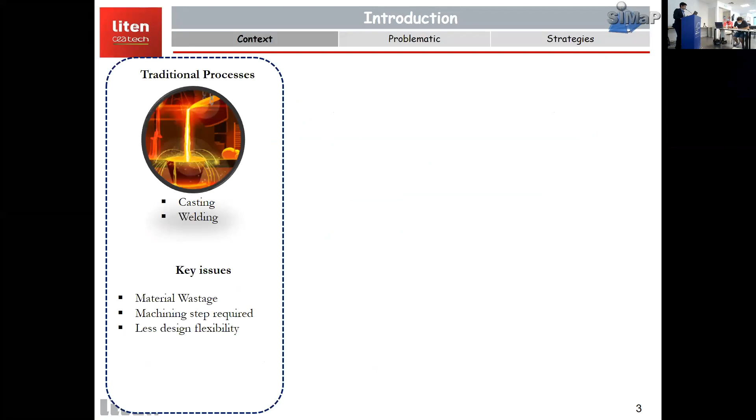To start with the context of study, most of the traditional processes, like casting and welding, have some key issues related to, for example, materials wastage, a lot of machining steps required, and less design flexibility. So to address this issue, let's think about additive manufacturing technologies.

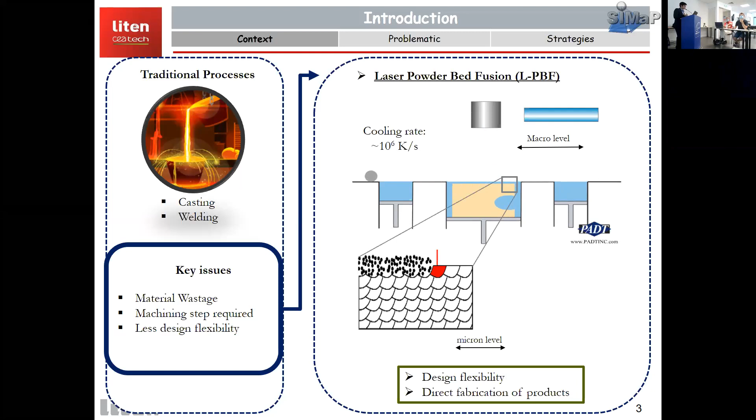For example, here the laser powder bed fusion, L-PBF process, which we used in the context. With the laser, basically you are melting the powder material, and due to the rapid solidification at very high cooling rates, for example 10⁶ Kelvin per second, you end up having very fine micro level melt pools, which leads to design flexibility with this process, and you can end up getting direct fabrication of products.

Now if we are looking into the additive manufacturing of aluminum alloys, the casting family is the most used, like the AlSi10Mg and AlSi7Mg, for instance. If we do L-PBF of these particular alloys, it's very easy to process, and you can get complex structures and complex parts directly out of it.

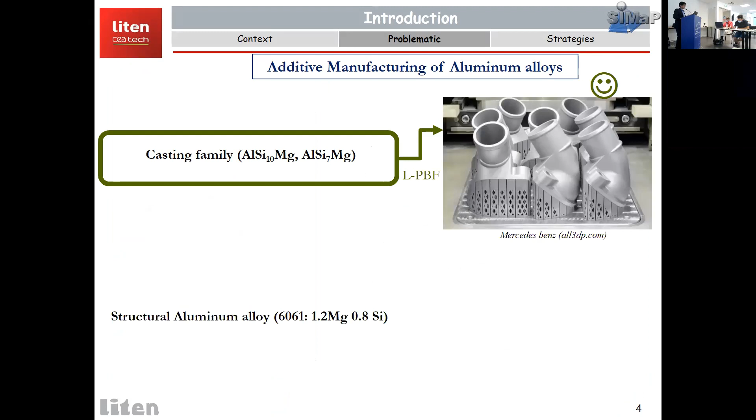If we look into the structural aluminum alloy, for instance, the 6061 aluminum alloy, which has magnesium and silicon as its major alloying elements, if we do the L-PBF of structural aluminum alloys, we tend to get a lot of cracks, and it's very difficult to process.

So now several strategies can be thought of to solve the problem of cracks. For example, the first one can be the solute content modification, which is very much reported in literature, like adding zirconium and scandium to induce heterogeneous nucleation sites, which gives you grain refinement, and this leads to cracking mitigation.

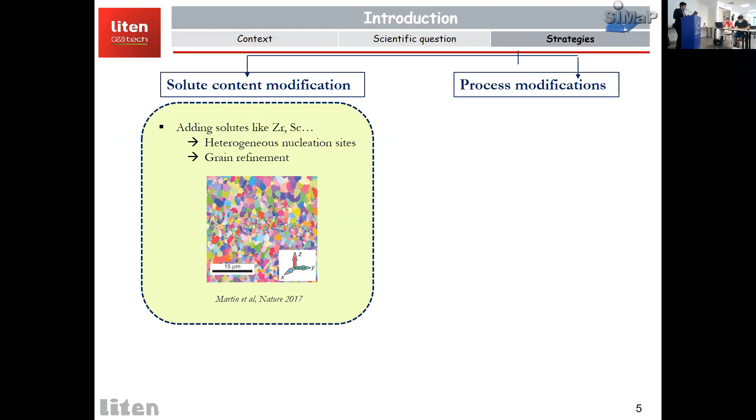The second way can be thought of as process modifications. For example, changing the laser power, laser speeds, the preheating, the scanning strategy, basically to change the solidification conditions like thermal gradients and solidification velocity.

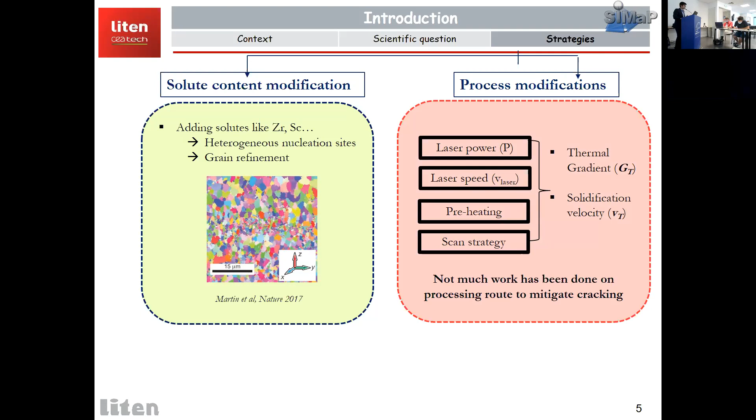But not much work has been done in this part of the strategy. For example, there's not much literature reporting cracking mitigation due to process modifications. So my thesis is focused on this particular aspect. The goal is to understand the fundamental mechanism of cracking, and if possible, produce guidelines to mitigate it, and also to understand if process optimization can produce crack-free samples or not.

Moving into the materials and methodology section. To start, describing the powder characteristics of the 6061 aluminum alloy. Here is the first composition - the standard composition of 6061 aluminum alloy and the actual composition of the powder we used. The composition is quite in the range of the standard.

In terms of morphology, the gas atomized powder clearly shows some satellites, spherical shape, and the powder morphology is polycrystalline in nature. In terms of size distribution, the powder was quite good in terms of the L-PBF requirement, going from 20 to 60 microns, and we achieved that size distribution with our powder.

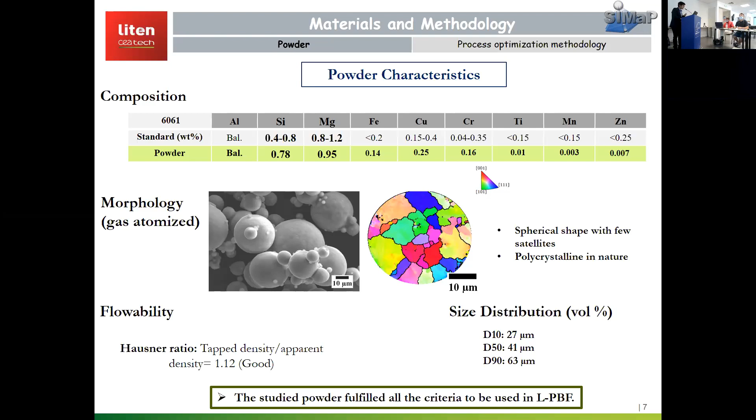In terms of flowability, this is also an essential criteria for L-PBF, because good flowability produces good dense parts. We classified and quantified this flowability based on a Hausner ratio, which came out quite good, and that's how we concluded the powder was good in flowability. So all these criteria were fulfilled in order to be used in L-PBF.

Now the methodology of the work. We started with the powder, did some 1D analysis and 2D track analysis with the laser tracks. The goal was to identify stable melting conditions, and based on those we can identify the process parameters, for example which laser power and laser speeds are needed to attain stable melting conditions.

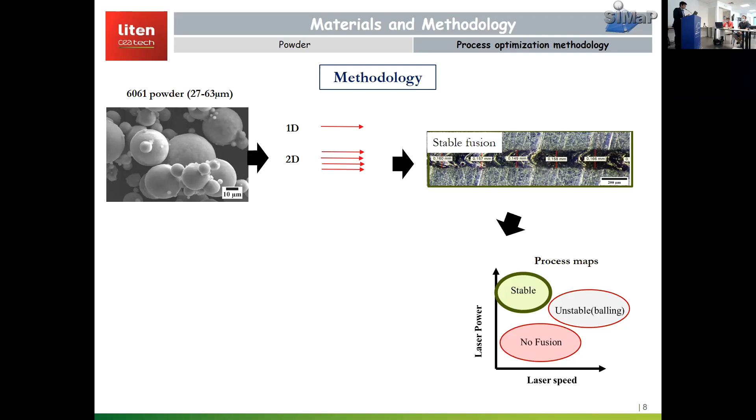Once we have that, we can print 3D cubes and identify the best optimized parameters. The goal is to achieve the highest relative density, dense sample, assuming stable melting conditions provide dense samples. The second goal is whether the stable conditions give cracking mitigation or not.

Moving into the results and discussion of this processing optimization methodology. To start, we did basic single track analysis, and studied the melt pool dimensions, for example the length to width ratio as a function of linear energy density - which is the ratio of laser power to laser speed. We can see clearly a rectangular hyperbola.

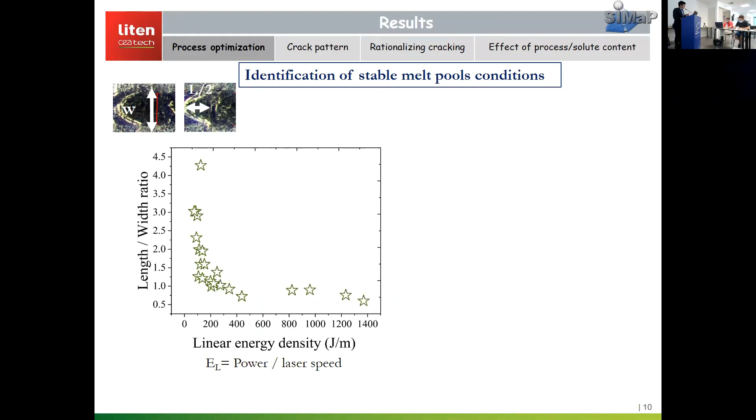For example, if you are at low energy, you have high length to width ratio, and at high linear energy density, your length to width ratio decreases. So for low energy densities, low power, high laser speeds, we found two particular conditions which are basically instabilities due to high speed - these instabilities are balling and humping.

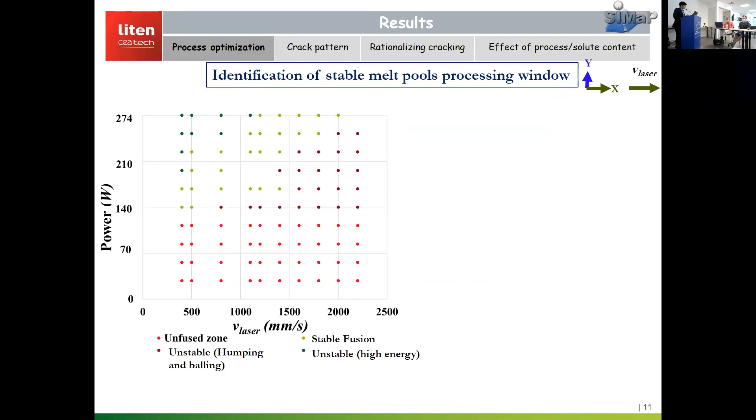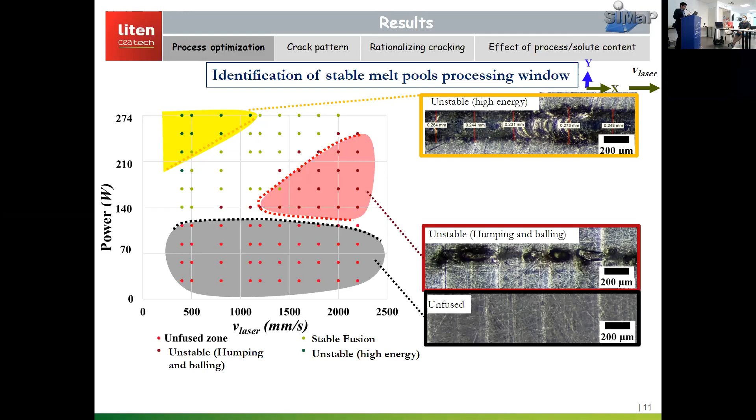If we look at similar different conditions in terms of the processing map, the y-axis is laser power and the x-axis is laser speeds. If you are at sufficiently high energy, you can end up getting unstable melting conditions, possibly due to intense convection flow from the high laser energy density. If you are at low energy density, low power, you can get an unfused region. If you are at sufficiently high laser speeds, you can get humping and balling as explained previously.

There can be particular stable melting conditions, which we identified as the green zone here. This was identified in the 1D track analysis. A similar processing map was identified for the 2D conditions, to understand the effect of when a laser passes just adjacent to a previous laser track. Similar conclusions were found using the 2D analysis.

So now we have identified stable melting conditions. Let's try to see the effect when we finally 3D print the cubes. For printing the cubes, we chose a simple scanning strategy without any rotation between the two layers. The choice of this strategy was to have a simple microstructure which is easy to interpret.

Based on the stable processing conditions we saw, let's analyze the density of the sample as a function of linear energy density. The density of samples increased as a function of linear energy density.

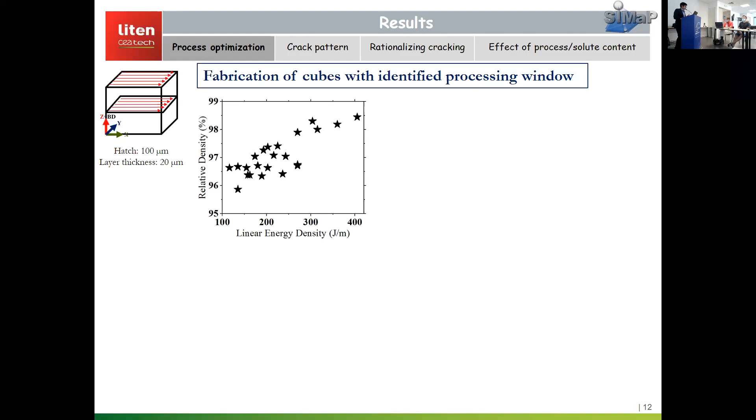For example, for low laser energy density, we can get microstructures having lack of fusion porosities, due to the lower linear energy density being given. If we increase the laser energy density, we tend to decrease the lack of fusion porosities. We achieve good relative density up to 98.5%, but we still have cracks present in the microstructure.

So all the stable conditions led to cracking, but there was a particular trend we observed. The mean cracking density measured from the microstructure decreased as a function of linear energy density.

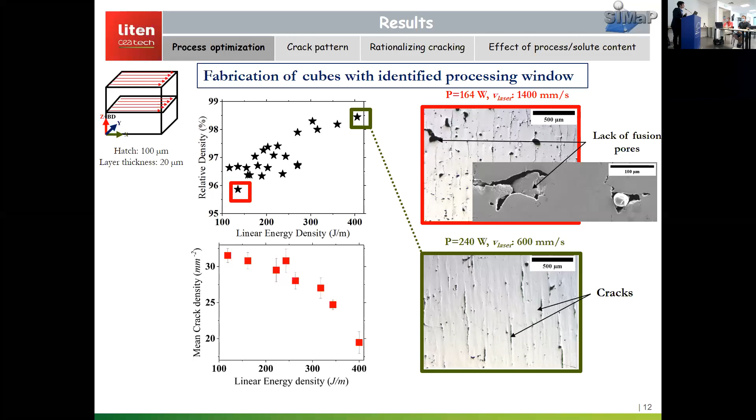So now one can say that since increasing linear energy density decreases cracking tendency, why not give more energy to the sample? Let me remind you, as I said in the previous slide, if we give sufficient energy we can end up getting instability conditions. So the optimized parameter here corresponds to where we found the maximum relative density, but cracks were still produced.

Moving into the cracking pattern, how does it occur and what is its mechanism? First, we identify where the cracking occurs based on the microstructure.

We chose the sample that was optimized, which had the least cracking, and analyzed its EBSD microstructure along the building direction. We clearly see that cracks are present in the microstructure along the building direction, and those are specifically along the grain boundaries.

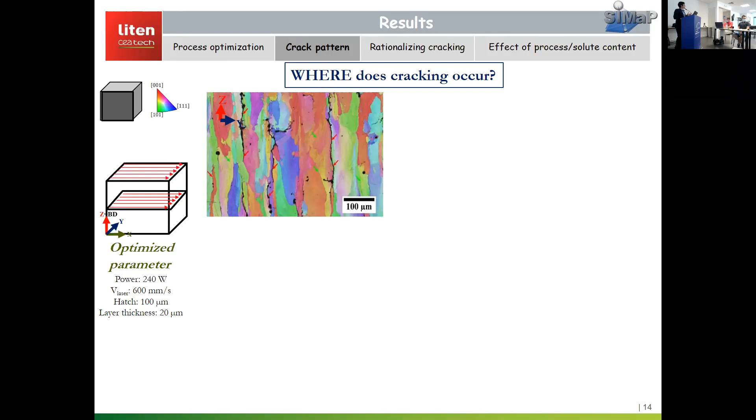But there were also a few high angle grain boundaries which were non-cracking in nature. To identify why these high angle grain boundaries are non-cracking, we thought we'd look at the relation of cracking with respect to the melt pools.

We clearly see that cracking is along the center of the melt pool. This explains why certain high angle grain boundaries, located away from the melt pool center, can be non-cracking. So cracking is intergranular in nature, occurring along high angle grain boundaries and exactly at the center of melt pools.

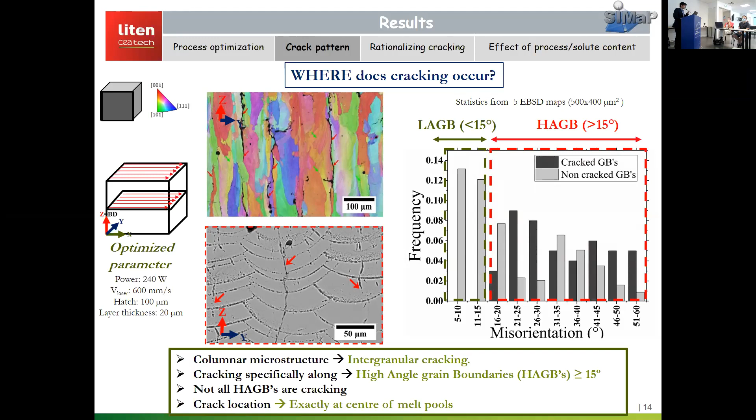Now let's see when cracking occurs. To do that, we performed fracture surface analysis, doing a tensile experiment on cubes perpendicular to the building direction. The aim was to identify the fracture morphology, so we could understand the origin of the cracking.

For example, here you see cellular dendritic arms growing, and a bit of initiation of secondary dendrite arms, though those are still in their initiation phase. This clearly indicates that cracking is due to liquid films trapped within the dendrites.

Now, cracking due to liquid film can be due to solidification or liquation. Solidification cracking can occur during the last stage of solidification, or liquation cracking can be due to remelted melt pools, for example.

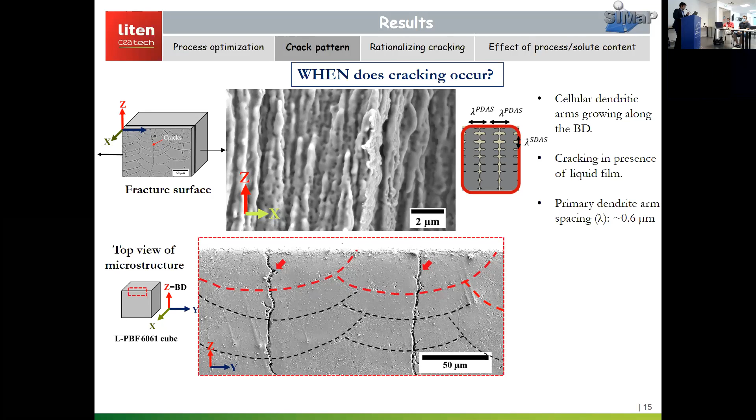To resolve this ambiguity, we looked at the final melt pool, the topmost melt pool regions which are not remelted. We clearly see cracks occurring in the last melt pool, which suggests that cracking is due to solidification cracking.

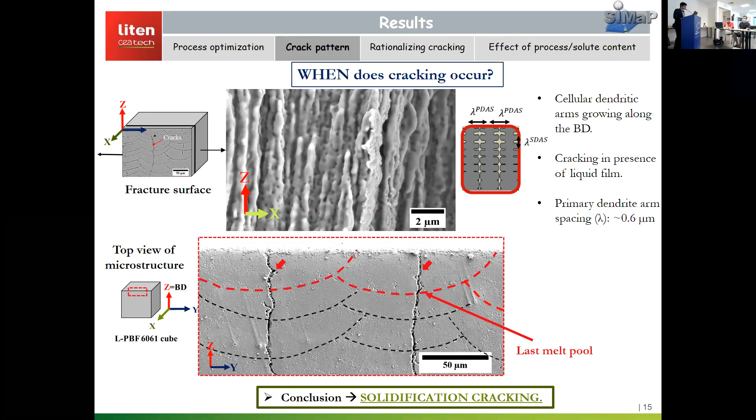Now we have identified where cracking occurs, along high angle grain boundaries at the center of melt pools, and we have also identified the cracking mechanism.

So now let's rationalize this observation based on different hot cracking models. The objective is to explain our experimental observations and justify why cracking is occurring in this particular way.

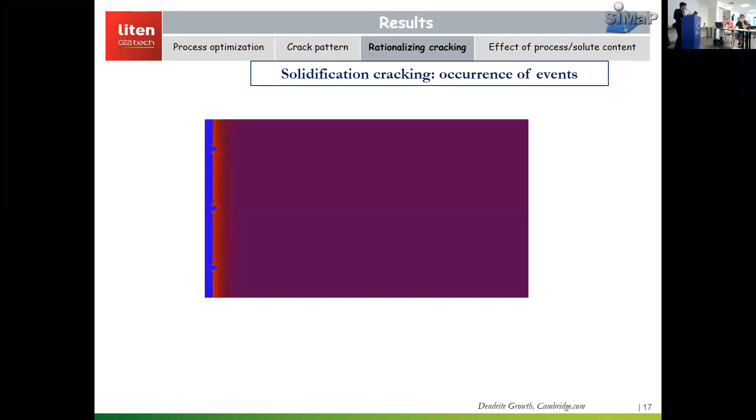So let's have a notion about what is solidification cracking and its different occurrences of events. For example, if we see the solid in blue color here and the liquid in violet color, and as a function of along the thermal gradient direction, our solids will grow. For example, you see the dendrites are growing.

At a particular stage, we reach a first stage where you have high liquid permeability, which means the liquid can easily enter the dendrites and compensate for shrinkage and deformation. Most alloys have this issue with shrinkage because the density of solid is greater than the density of liquid, so you have shrinkage and deformation issues.

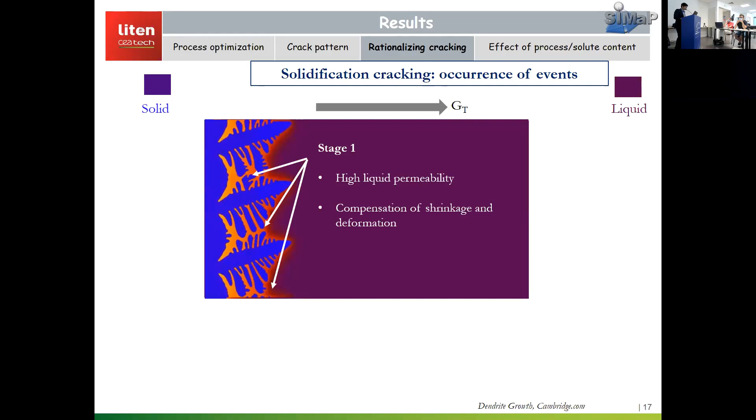If you continue the solidification, you reach a particular stage where dendrites start to get connected to each other. This is the coherency point, where liquid film starts to form. Further continuing solidification, we see the third stage where the liquid films are continuous in nature, and since they are continuous, the mechanical resistance to these liquid films is very low. So this is the most sensitive region of the dendrite morphology where solidification cracking can occur.

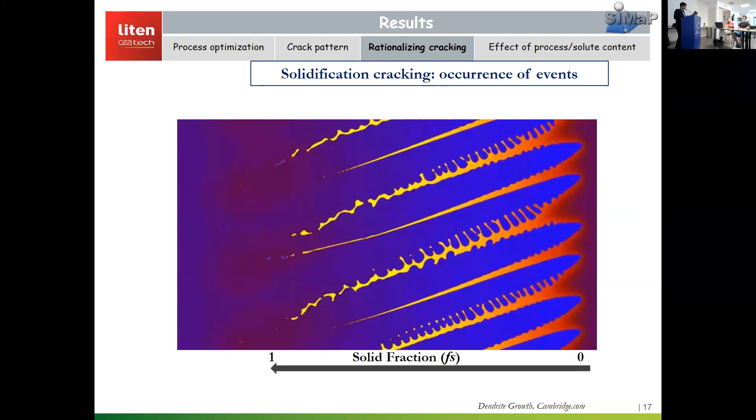To summarize these occurrences as a function of solid fraction: for low solid fraction, we have easy feeding of liquid, so no feeding problem. The second region is before the dendrites start to coalesce. After the coalescence point, we have good transmission of mechanical strains to the neighboring dendrites. So before coalescence, it's most critical for cracking, and after coalescence you have a more resistant mushy zone. So the solidification cracking occurs in a critical region.

So now moving further, we thought let's use a very predominant model, the Rappaz-Drezet-Gremaud hot cracking model, to understand the initiation of cracking.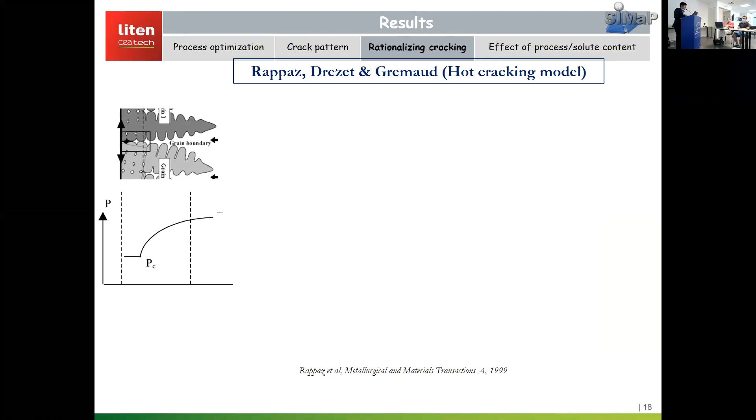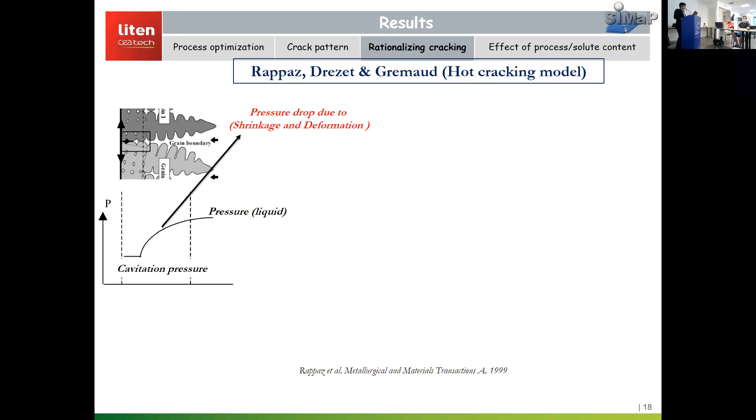So when two dendrites are growing along the thermal gradients, in the RDG model, they try to understand the pressure drop in the mushy zone as a function of distance. The pressure in the liquid starts to decrease and reaches a particular cavitation pressure, and once it reaches this cavitation pressure, a cavity nucleates, and this leads to cracking. This decrease in pressure is due to shrinkage and deformation. So higher the pressure drop, higher the cracking tendency.

So if we look at how we estimate this pressure drop, it's a complicated equation, but let me simplify it. It's based on different material parameters like the shrinkage factor, viscosity, and the solid fraction as a function of temperature. These are the material aspects of the model.

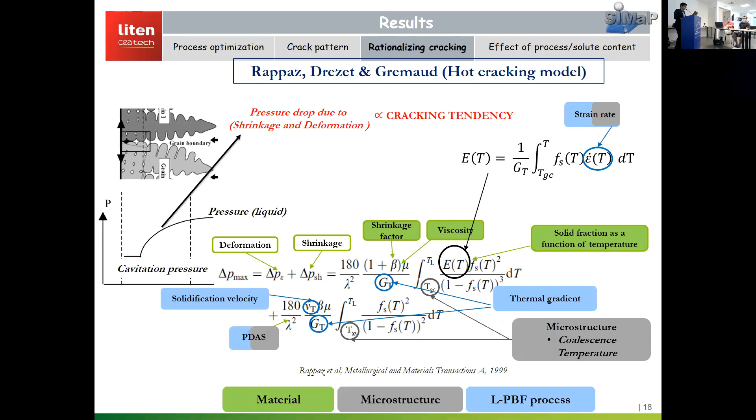The process aspect includes the thermal gradients and solidification velocities. There are microstructural aspects, like the coalescence temperature, which is the lower bound of the integral - at what temperature the dendrites start to coalesce. And there are other factors based on microstructure and processing, like the primary dendrite arm spacing and the strain rates.

So now we thought, let's use this model and try to identify the different inputs needed to run it. The first input is the material parameter, which is solid fraction as a function of temperature.

We relied on the Scheil-Gulliver model to estimate this parameter. We thought this could be a better representative of the L-PBF process, since diffusion in the solid is neglected and there is infinite diffusion into the liquid. So compared to equilibrium, we chose Scheil-Gulliver to define solid fraction as a function of temperature.

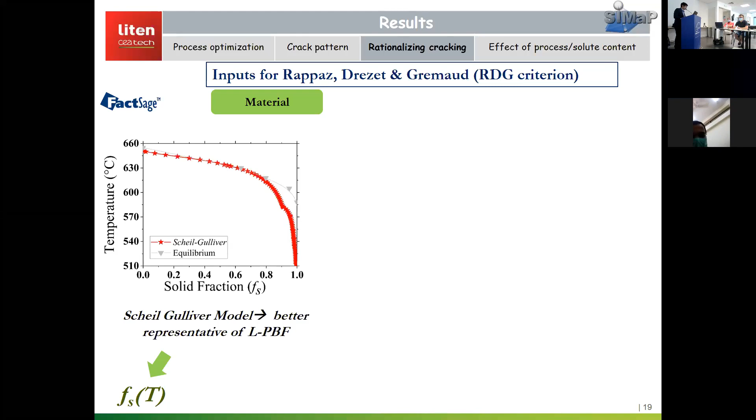The second input parameter is the microstructure aspect. We have seen in our experiments that high angle grain boundaries were cracking, so can we somehow include the misorientation aspect into the model? The way to do that is by modifying the lower bound, which is the coalescence temperature. If we can identify this temperature as a function of misorientation, we can take that into account.

The last aspect is the L-PBF process parameter. For this, we relied on simple Rosenthal analytical solutions to get a notion of thermal gradients and solidification velocities.

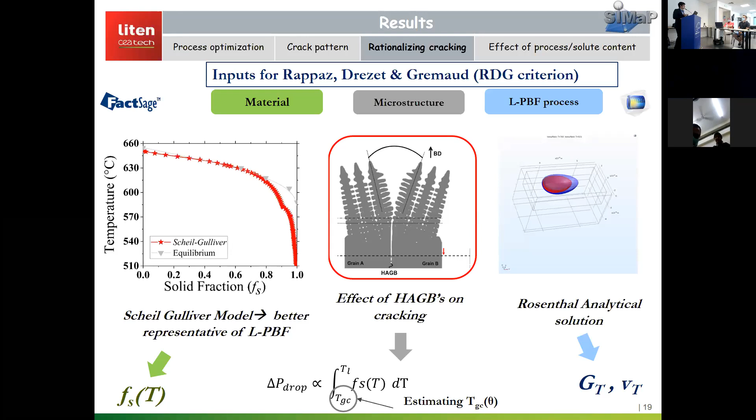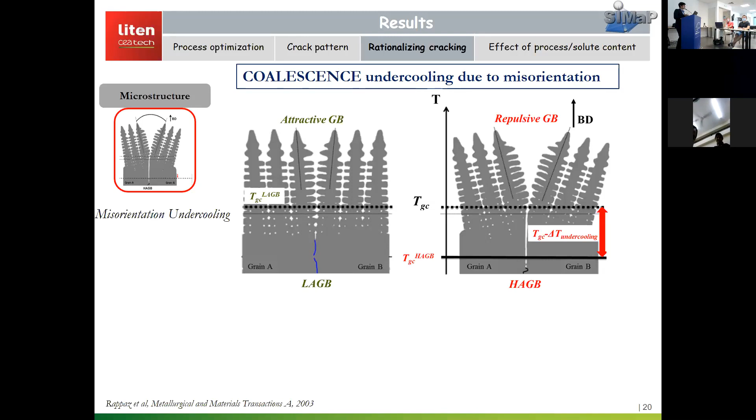Okay, so now let's start coalescence undercooling. Why, and how we can take that into account. So to define here, what are low angle grain boundaries - for example, low angle grain boundaries can be attractive grain boundaries. So as soon as these grain boundaries are in the vicinity of each other, they coalesce. And there will be high angle grain boundaries which are repulsive in nature.

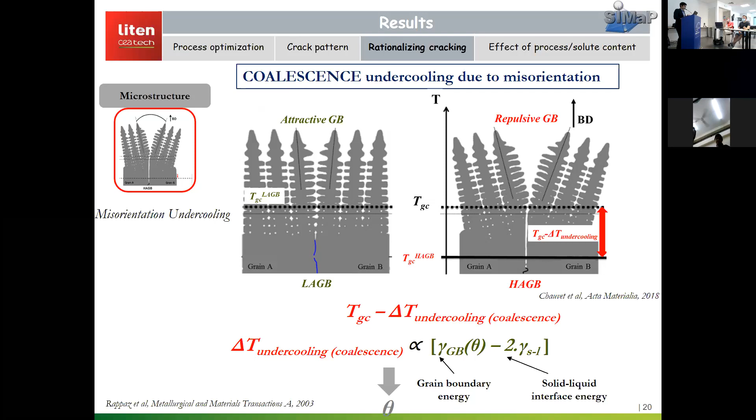So they need further coalescence undercooling in order to coalesce. This undercooling in coalescence, according to the coalescence model of Rappaz, is dependent on the grain boundary energy and the solid liquid interface energy. So in order to estimate what is the coalescence undercooling, we need to have an idea of grain boundary energy and solid liquid interface energy.

We relied on the literature based on Guilhem ROUX's work. Basically they did the tensile test of a mushy zone and found that the stress increases in the mushy zone after a particular solid fraction of 0.97. So they concluded that this is the coalescence solid fraction of the 6061 aluminum alloy. We use this value in our L-PBF condition, assuming that in L-PBF condition we might not have a change of coalescence solid fraction. That's why we use this particular solid fraction value.

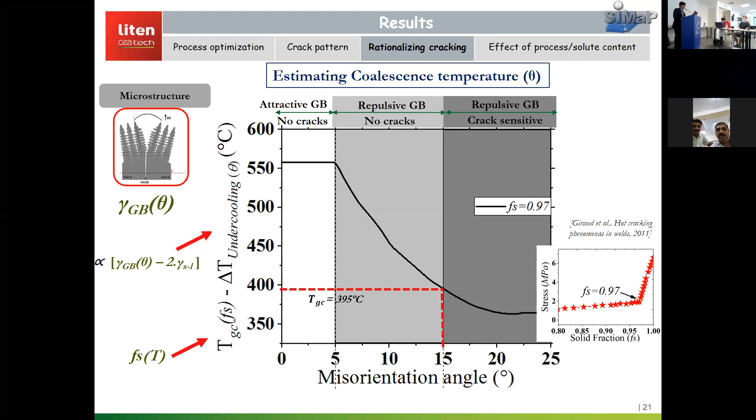Okay, now the other part of the puzzle is identifying the solidification parameters. So we chose the optimized parameters and used the Rosenthal analytical solution to get an idea of thermal gradients and solidification velocities.

Here is the building direction thermal gradient map, for example where the laser is moving along the x-axis on the right side, and using the Rosenthal model we can identify the thermal gradients. Here there are different curves: the red contour indicates the liquidus temperature, the green contour indicates the coalescence temperature at solid fraction of 0.97, and the black contour indicates the temperature of solidus.

So we estimated the thermal gradients along the coalescence solid fraction. As a function of melt pool depth, the thermal gradients - we clearly see that we increase the thermal gradient as we go into the depth. So lower in the melt pool we have higher thermal gradients, and above we have low thermal gradients.

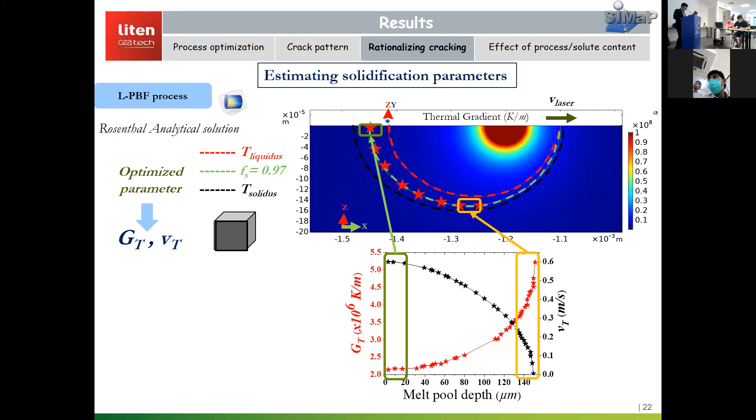But if you look at the solidification velocities, it is completely different in nature - it is inverse. So at the bottom you have low solidification velocity, and at the top you have high solidification velocities. So these parameters are varying inside the melt pool. We thought, okay, for a given laser power and laser speed, let's just take the average values along the melt pool and use this into the model. So this is how we obtained the thermal gradients and solidification velocities.

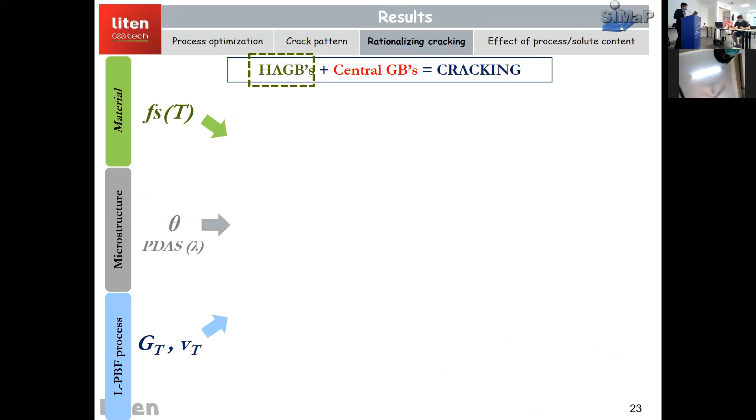So now to address finally why high angle grain boundaries were cracking: based on our different inputs - the material, the microstructure, the L-PBF process parameters - we were finally able to estimate the pressure drop as a function of misorientation angle. Again, here we chose the same solid fraction value of 0.97 for the sake of simplicity. Looking at the total pressure drop, after a certain misorientation of 5 degrees we see clearly a jump in the pressure drop.

So this clearly suggests that the pressure drop, in other words, the cracking tendency, is sensitive to high angle grain boundaries. For example, we know that the repulsive grain boundaries from 5 to 15 degrees will not be cracking, because in our experiments we have seen that it occurs only after 15 degrees.

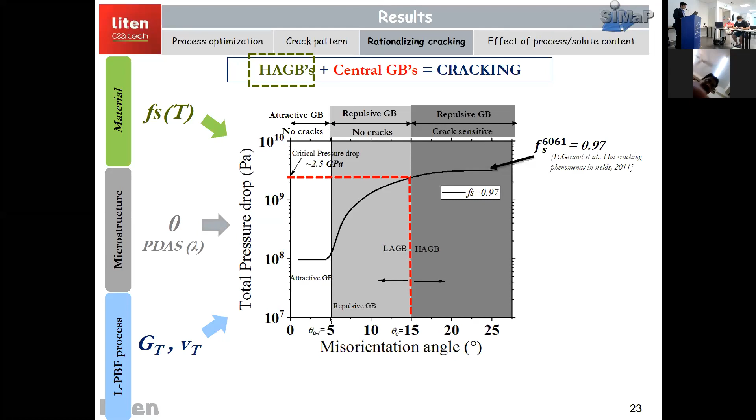So we said, okay, at 15 degrees, corresponding to a solid fraction of 0.97, let's estimate the pressure drop. This will be the critical pressure drop above which cracking will occur. We estimated that to be around 2.5 gigapascals. So this is how we estimated that cracking can be sensitive above this critical pressure drop.

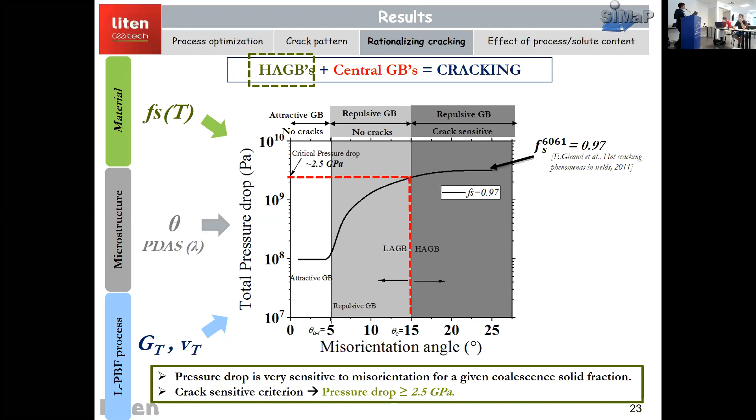And pressure drop is also very sensitive to misorientation. So this is how we took into account the high angle grain boundary cracking.

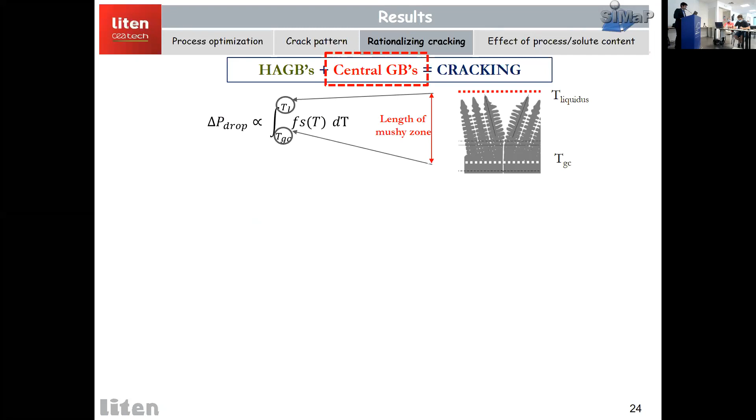Now to identify why the central grain boundaries are cracking, we relied on the equation of pressure drop, where the integrals go from coalescence temperature to the liquidus. So if we look at the bounds of these two temperatures, and within these bounds, what is the length of the mushy zone, if we are able to quantify this on a microstructure level, we can have an idea about why cracking can be along the center lines.

So here is a reminder of the top view EBSD image of our sample. Lasers are moving along the X direction here, and we clearly see that the cracks follow the laser tracks.

So if we look based on our thermal simulation, the temperature fields in the vicinity of where the laser is moving, based on different contours, the liquidus and the coalescence contour here at 15 degrees, the white contour, we can estimate the length of the mushy zone by dividing by the thermal gradient.

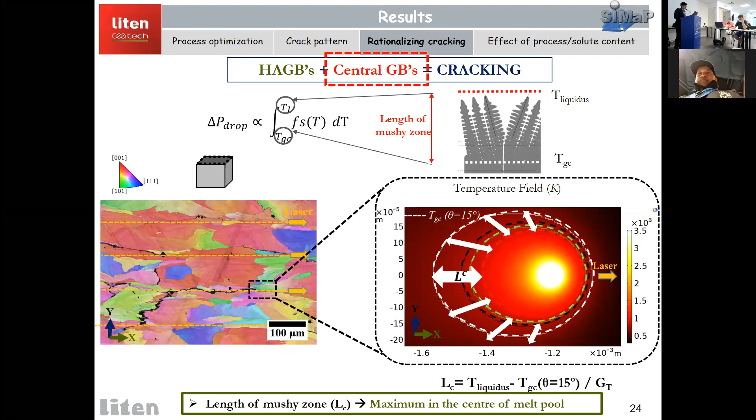We clearly see that along the center line, we have a high length of mushy zone, and this suggests that we might have higher pressure drops in that particular region. This explains why we have center line cracking at the topmost surface.

Okay, now we have rationalized our cracking. Now let's try to understand whether we can find some parameters which are less sensitive to cracking or not.

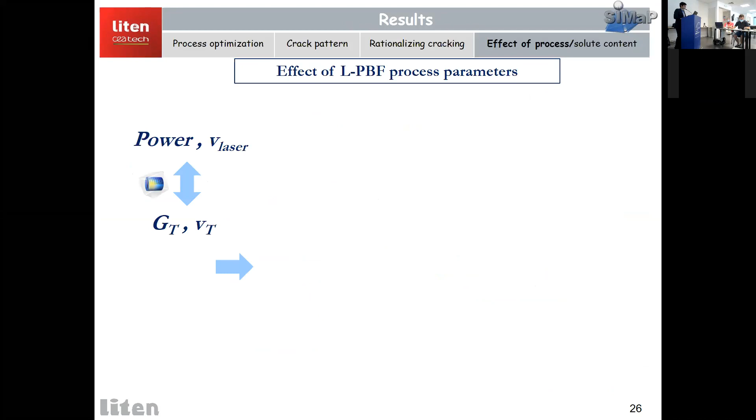So to do that, what we did was take a range of laser powers and laser speeds, and we linked it to the thermal gradients and solidification velocities with our thermal simulation. And we generated this hot cracking sensitivity map.

So this map is basically, on the y-axis you have thermal gradient, on the x-axis you have solidification velocities, and on the z-axis you have pressure drop.

The black region here indicates the crack sensitive region based on our critical pressure drop of 2.5 gigapascals. As you move away from this black region, you tend to be in a non-crack sensitive region, which basically gives you decreasing pressure drops.

Okay, so this is the prediction, this is what our model suggests. But is it in line with our experimental observations or not? To check, we looked at the crack density of the optimized sample and superimposed it onto this HCS map.

We found that the crack density of 19 per millimeter square was just along the interface where you have transition from crack sensitive to non-crack sensitive. If we look at other parameters which we studied, we see an increase in crack density as we move away from the interface.

So the experimental points are qualitatively in agreement with what we have estimated with the HCS map.

So one inference from this HCS map can be: by decreasing the solidification velocities to 0.2 meters per second, we can be in the non-crack sensitive zone. To achieve that, we need laser speeds of around 100 to 200 millimeters per second, which is quite low. So these are insights from the model.

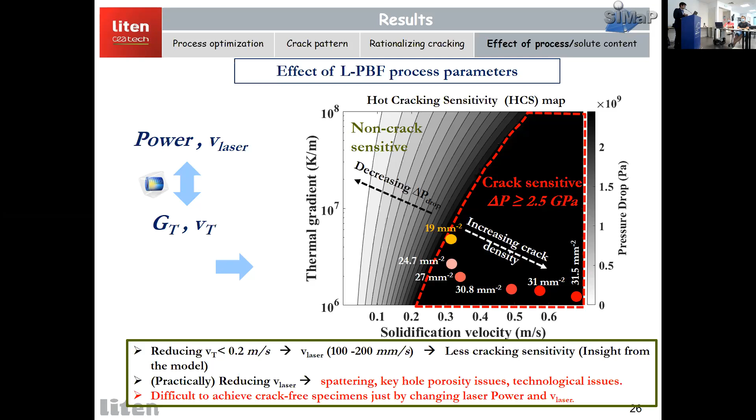So since it was not enough just playing with powers and speed, we shifted our attention to preheating of the powder bed, because in literature it is reported to mitigate cracking.

Here is a microstructure where for a particular linear energy density, for our case with no preheating condition, we get cracking. But for a similar linear energy density with preheating of 500 degrees Celsius, this from the literature, we end up having no cracking. So the difference we have observed is the primary dendrite arm spacing.

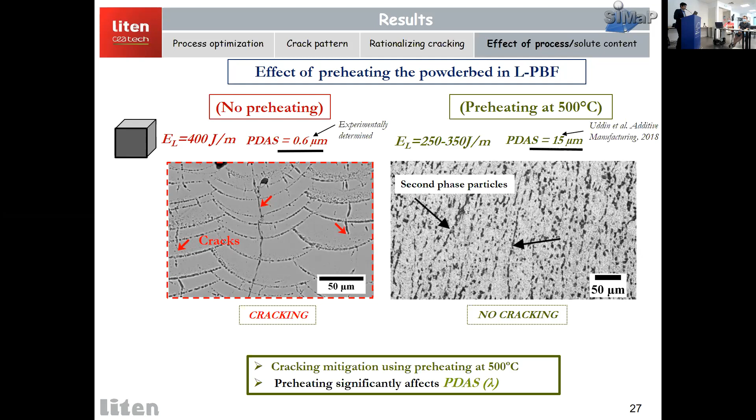For our case, we have around 0.6 microns, which we experimentally measured. But from the literature, this particular microstructure shows that the primary dendrite arm spacing is way bigger than what we observed, around 15 microns. So cracking mitigation is possible due to 500 degrees of preheating, and the main difference with what we observed is the primary dendrite arms in the two cases.

So now the idea is, can the RDG model capture the beneficial effect of preheating or not? To do that, we changed laser power, speeds, and preheating temperatures to have an idea of thermal gradients and solidification velocities.

Here is the thermal gradient as a function of melt pool for no preheating conditions, the red one. And if we introduce the preheating temperature of 500 degrees Celsius, we see clearly a decrease of several orders of magnitude of our thermal gradients.

But let's see what solidification velocities give. For no preheating, we have a decrease as a function of melt pool. But when we introduce the 500 degrees Celsius of preheating, our solidification velocity is not that much affected. The magnitude is not changing, although there is a slight difference since melt pool dimensions might change due to preheating. So the thermal gradients are hugely affected without much effect on solidification velocities.

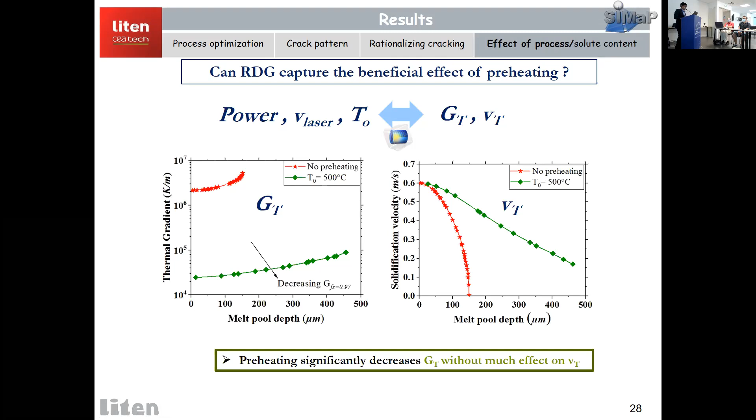So now we implemented these parameters into the RDG model just to see what the model is suggesting. We generated similar HCS maps for the no preheating condition on the left. And on the right, we have the preheating condition where the thermal gradients are hugely decreased, taking into account the primary dendrite arm spacing as well.

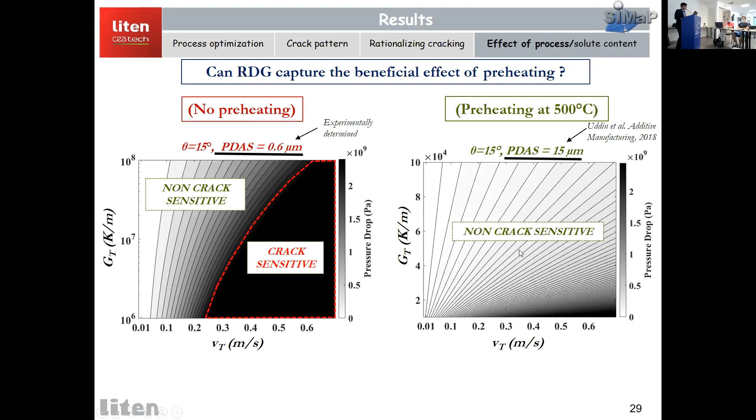We clearly see that the HCS map on the right for the preheating condition gives us low pressure drops, and this indicates that we have a less crack sensitive microstructure. So the RDG model was able to capture the beneficial effect of preheating.

But we know that these preheating conditions raise concerns in terms of productivity. Since you are increasing the temperature, you are evaporating volatile elements like magnesium, and there are difficulties related to installation. So in short, it can be a bit tricky to implement preheating.

So let's now change our attention towards the effect of solute content modification. Just to remind you, in my introduction I said I would be focusing on processing optimization. So now why am I shifting? It's just to give an idea about how the model allows us to rationalize different solute strategies, which are already defined in the literature.

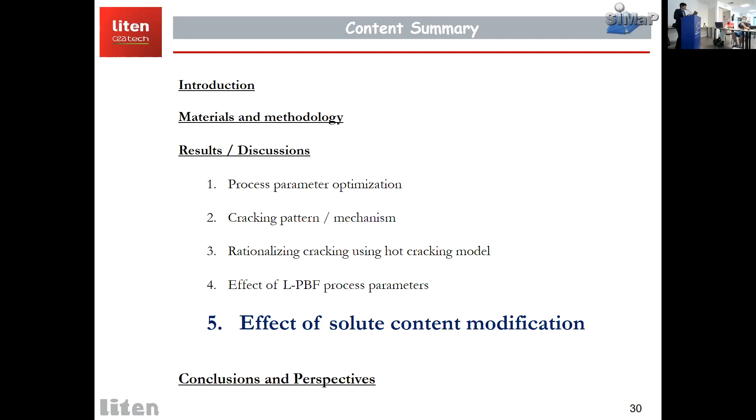Since L-PBF process parameters were not able to mitigate cracking, we shifted our attention a bit. We did several solute content modifications into the standard 6061 aluminum alloy, but here I will present just one particular case: zirconium addition. Zirconium addition is widely reported in the literature to be cracking mitigating. So the idea is whether this mitigation with zirconium can be captured by the RDG model or not.

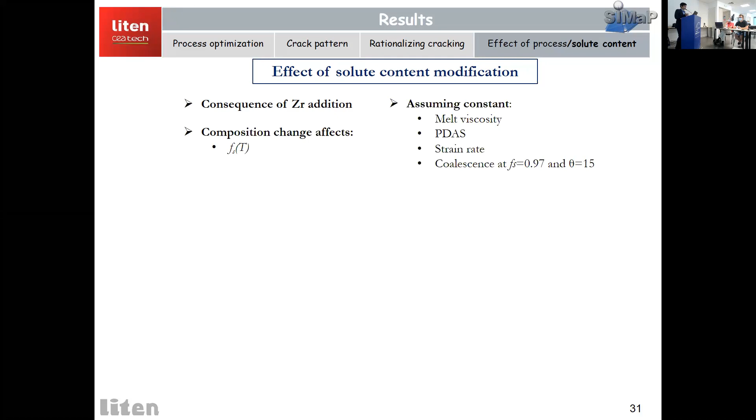We end up getting high crack sensitivity with zirconium addition. This is contrary to what is presented in the literature.

So to identify what is lacking in the model, we thought, okay, let's check the microstructure of the zirconium modified 6061 aluminum alloy. The microstructure is quite complex here. For example, compared to our standard 6061 aluminum alloy, we clearly see it's a duplex microstructure with columnar grains, the long elongated grains, and equiaxed grains present simultaneously. So it is quite different compared to our standard alloy.

So this is probably the reason the RDG model was not able to consider the grain refinement introduced by the zirconium, and why we were not able to capture the beneficial effect of zirconium in the 6061 aluminum alloy.

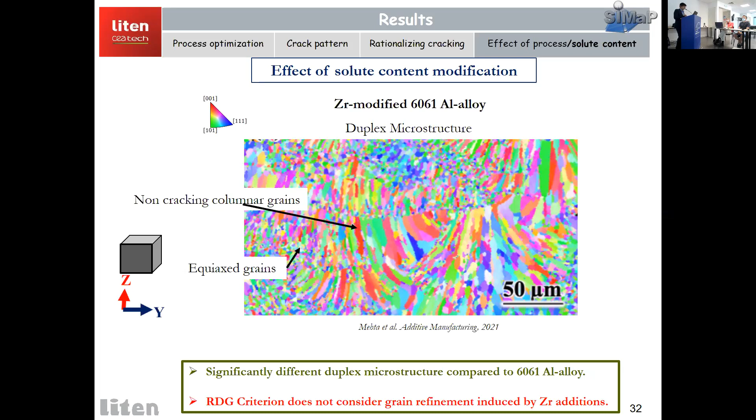So, we have studied processing optimization, and we have studied a bit of solute content modifications. Now, based on all the study, let me present the final conclusions of the work.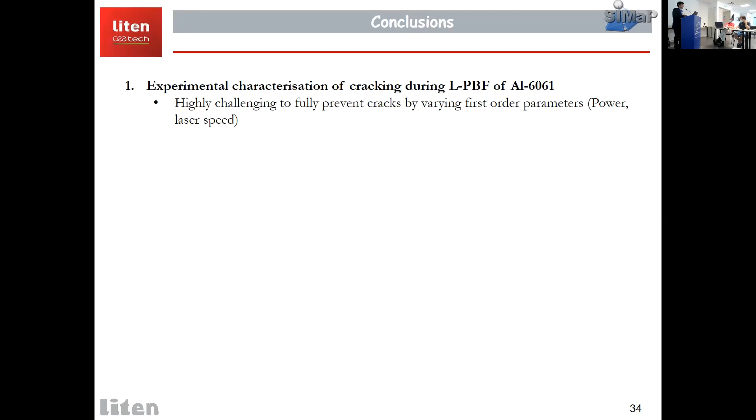Based on the experimental characterization of the 6061 aluminum alloy produced in L-PBF conditions, we concluded that it is highly challenging to fully prevent cracks by just playing with the first order of process parameters. We know that cracking occurs particularly at high angle grain boundaries and exactly in the center of melt pools.

Cracking has a particular mechanism, which is solidification cracking, occurring in the last stage of solidification. Based on our modeling work of crack initiation, thanks to the RDG model coupled with the coalescence theory and Rosenthal simulations, we were able to estimate a particular critical pressure drop, around 2.5 gigapascal, above which cracking becomes quite sensitive.

We also identified the processing parameters which are key to reducing this pressure drop. For example, we need to go to low laser speeds, and we need to implement high preheating temperatures.

In our study, we also identified key metallurgical parameters, such as the coalescence solid fraction, the primary dendrite arm spacing, the misorientation aspect of the microstructure, the viscosity, and the solid-liquid interface energy. These are the parameters we identified.

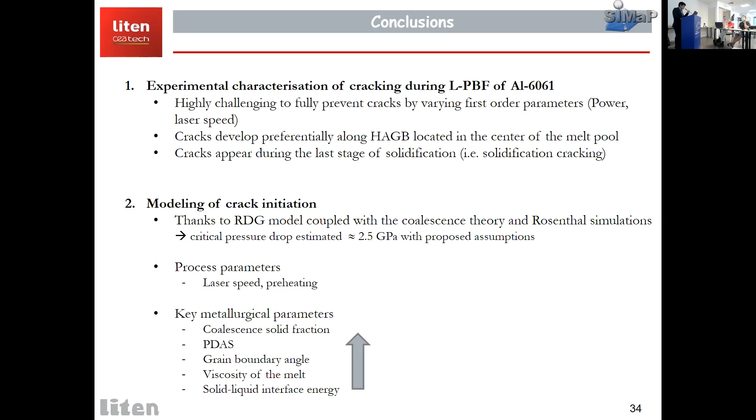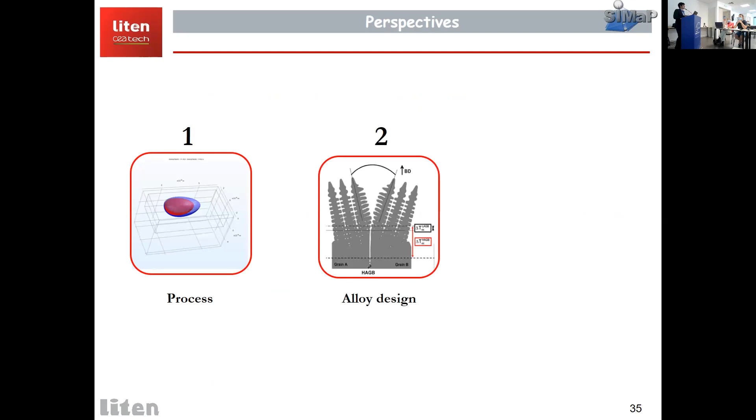Now let's see what future perspectives we can think of. We have identified three different directions we can go. The first is the processing aspect. The second is the alloy designing aspect, which metallurgical parameters we need to consider. The third is improvement to the modeling strategy, how we can implement different aspects and improve the model.

The first is the processing way. We know that by managing and controlling the cooling rate, we can clearly control the primary dendrite arm spacing. This can be done by implementing preheating and implementing twin lasers as well. If we can put two different lasers into the machine, one just preheating the powder and another just melting, we can control the cooling rate and have a direct effect on primary dendrite arm spacing, which might change the cracking tendency.

Another possible aspect could be studying the effect of scan strategy. We didn't study this in detail in our work, but it's possible, because changing the scanning strategy between two different layers can modify local parameters and have an effect on cracking tendency.

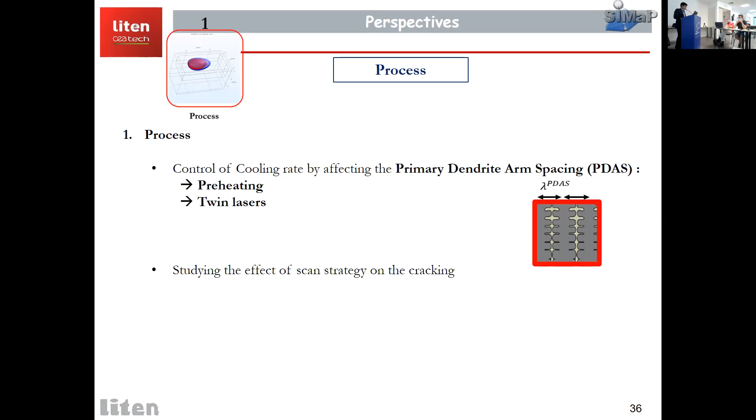The second aspect could be thought of as the alloy designing aspect, with different metallurgical parameters. The most important parameter we identified in the study is the coalescence solid fraction. Based on our sensitivity analysis to pressure drop, just by changing the coalescence solid fraction, we change the pressure drop by different orders of magnitude. For example, going from 0.9 coalescence solid fraction to 0.97, we have a huge increase in pressure drop.

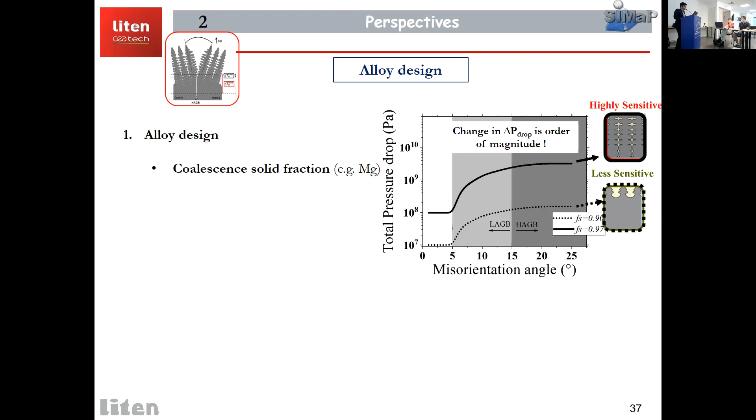So a lower coalescence solid fraction gives less sensitivity to cracking, and a high coalescence solid fraction gives high sensitivity to cracking. This sensitivity also held going from 0.90 to 0.97 coalescence solid fraction - just a small change produces a huge difference in pressure drop. To achieve a low coalescence solid fraction, we found in literature that magnesium is an element which can affect it. With magnesium addition, we can decrease the coalescence solid fraction.

The second interesting parameter is the solid-liquid interface energy. We know this parameter controls the coalescence undercooling, and this is how it can affect cracking occurring at high angle grain boundaries. It's reported in literature that solid-liquid interface energy can affect the growing dendrites, like the anisotropy of the growing dendrites, and change their particular orientation.

For example, zinc is reported to have an effect on the solid-liquid interface energy. So further research efforts are needed to take that into account and identify which elements can control the solid-liquid interface energy.

The last parameter to be thought of is the viscosity of the liquid. We know viscosity can be temperature dependent and also solute content dependent, and it is very tricky to understand which viscosity is needed to achieve a crack resistant microstructure. In terms of binary phase diagrams, it's easy to estimate viscosity, but when you have a complex composition like 6061 alloy with so many elements, you need to study the effect of each element on the final net viscosity. So there is scope for improvement in understanding the viscosity of 6061 aluminum alloy.

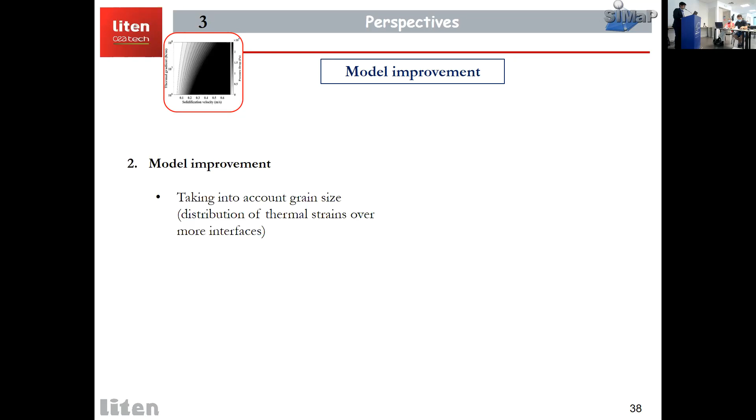We know that the RDG model was not able to capture grain size, so how can we take grain size into account in the model? For example, if we have a refined grain structure, we can distribute the strains felt by the growing dendrites into more interfaces, and this is how we decrease the net strain rates felt by the growing dendrites.

Another way is having a better prediction of microstructures. In our modeling criteria, we never predicted microstructures. So if we have a better prediction of microstructure and implement the RDG criteria simultaneously, we can have a better notion of predicting cracking.

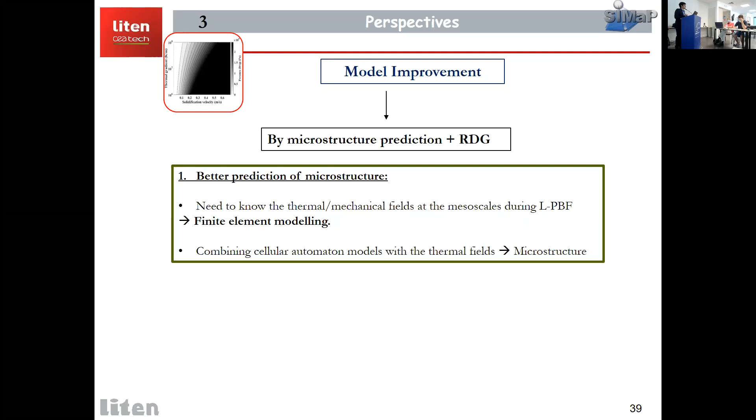To predict microstructure, we can think of doing several finite element simulations based on the local thermal and mechanical fields at really small mesoscales, taking into account the L-PBF processing parameters. By combining this with microstructural models using cellular automaton models, we can probably predict the microstructure in L-PBF for a given composition.

We can also use these predicted microstructures and combine them with the RDG model to finally estimate the pressure drops in the intergranular regions of the material. Using different fluid flow models, we can estimate what pressures are needed to achieve a critical point after which you might have cracking. So pressure drops can be calculated within the grain boundary network using different fluid flow models.

In this way, we could have a better estimation of our cracking tendency if we are able to predict microstructure. Using this particular methodology, we might be able to predict the beneficial effect of zirconium, since it refines our microstructure. This is how we can predict in a better way.

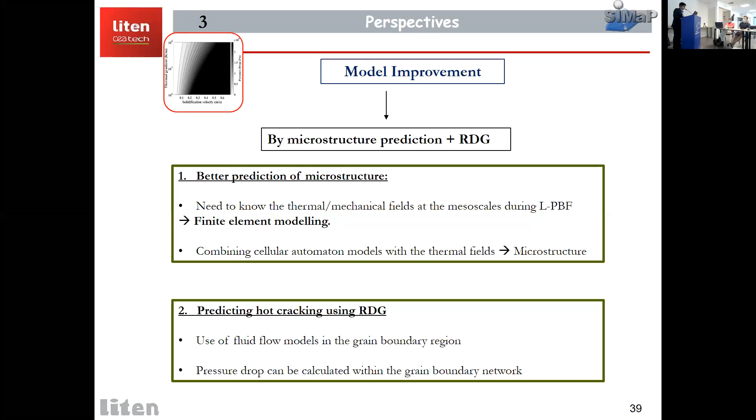So that was it for my perspective points, and thank you for your attention, everyone.

Thank you, Akash, for this very clear presentation. I really liked it, merci beaucoup. It was very nice to follow, and it made a good summary of the huge amount of work you've done. So now let's go to the first examiner, Aude Simar.

Yes, hello, do you hear me well? Yeah, we can hear you.

Okay, congratulations, Akash, for this nice presentation and for the nice work, as I already said in my report. It was really nice to see a fundamental analysis of hot tearing, because you often see people mentioning hot tearing without confirming anything. I think it was nice to have this analysis and the fundamental aspect of it. The experiments were nice, and the model interesting, and the maps that you developed were interesting.

I do have a few questions for you. Some of them I mentioned in my report, and maybe will not be discussed today due to time. So let's go for my first question, concerning page 84 of the manuscript.

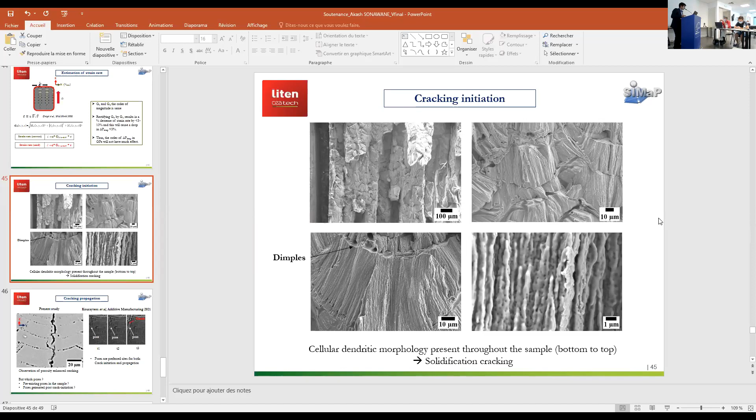Okay, so other little things that I mentioned in my report. I think you made a little mistake on the strain rate. Yeah, I agree that it was a good point, a slight mistake, but it is not going to change much. We estimated our pressure drop values based on this slight change of replacing GN by GX. It will have a slight effect on the pressure drop, but not so much, I think.

By the way, the pressure drop, yes, Aude mentioned it, you find very huge values, gigapascals, things like that. Don't you think that something will happen before reaching this cavitation pressure simply?

Yeah, for sure. So in other words, one can see the pressure drop as a sensitivity to cracking. The higher this quantity, okay, physically it's a pressure drop, but experimentally speaking, the higher this quantity, it's a hot cracking sensitivity. Because imagine in that liquid film, you have plenty of solutes that can be rejected. You have other phases, new phases that might appear, metastable phases, we don't know, and pores as well, microporosity.

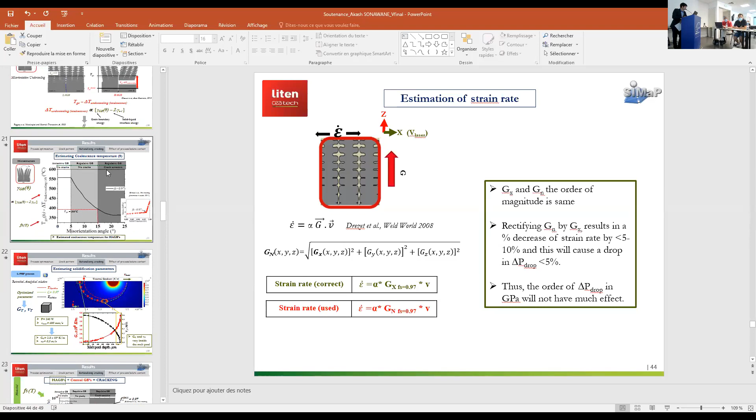Okay, can you go to slide 20? Maybe it's easier to see on the slides. Yes, so delta T undercooling, that's clearly mentioned in your PhD work, that I really appreciate. Yes, okay, it's a function of two

quantities, the solid-liquid interface and the grain boundary energy. If you had to act on these quantities, which one could be the predominant one, and how would you act, to decrease this delta T? Do you have any idea?

It's an open question. Yeah, I agree, and it's quite an interesting question as well, because if we are able to control these quantities, we control the coalescence undercooling. And if we control the coalescence undercooling, we can control the liquid films not persisting up to lower temperatures, basically.

So I have this feeling that the solid liquid interface energy, which is a very important aspect of coalescence theory, is reported in a few publications by Professor Rappaz, where he tried to change the composition of aluminum alloy with zinc and other elements. He observed a change in dendrite orientations, and this solid liquid interface energy is able to control the anisotropy of the growing dendrites. This is what I think, but it might not be true. If we identify elements that clearly control this solid liquid interface energy, we might have better control over the coalescence.

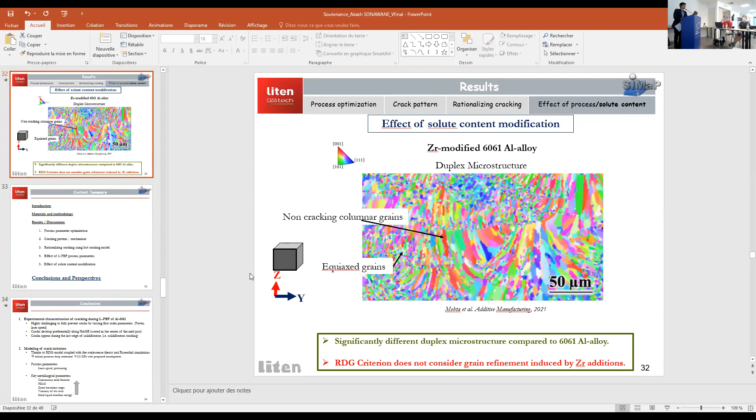Yes, strain localization. One well known way to reduce hot cracking is to have a finer microstructure, because each liquid film that might survive will support less strain. So in your process in L-PBF, could you imagine having a finer microstructure?

Based on changing compositions, we have shown that if we add zirconium, we get grain refinement. We clearly show that the columnar grain width changes with zirconium addition. So if we see refinement due to such elements, we can...

Peut-être. I have muted everyone, okay.

So returning to the point, since we have smaller columnar grains growing, we could identify that the strains acting over the entire region might be distributed into several interfaces. If we include this into the modeling aspect, we could take into account the grain size aspect. So that was your question — in the process, in other words, could you imagine using grain refiners?

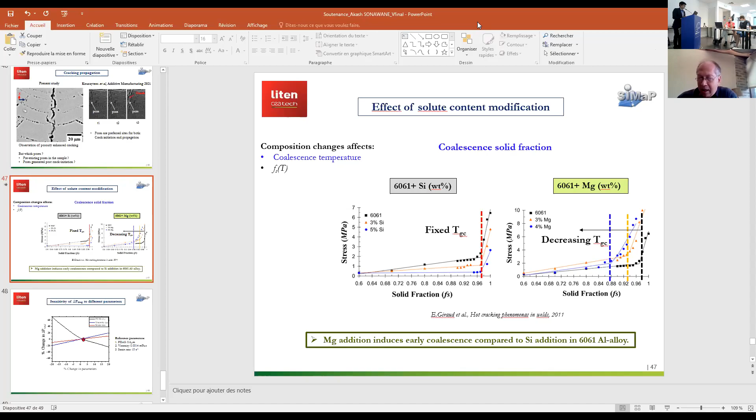So I was very pleased to read your PhD work. Very interesting. I must confess that I was not so familiar with aluminum alloys, but I do work on nickel-based superalloys, and I can see strong similarities between these two families of alloys. So I'm not completely lost. I was very impressed by the quality of the work, both experimental and numerical, and you are feeding very well both experimental and numerical aspects, discussing both. So that's a very nice PhD work for that.

And about the manuscript, I noticed that it is very well written. I was waiting for the first fault, page 78. So, so very few faults. That's very nice, nice manuscript. And also, I should mention that you can read it like a detective novel. Who is responsible for cracking? You see, so that's very interesting to read.

Thank you for your comments. Yeah, so to start, I have two comments and very easy questions. The first comment was about, you didn't mention at oral presentation, but at the beginning you had two powders, and you tried to find one of them. And you mentioned that maybe powder 2 was not very good, didn't have very good flowability because of the moisture. And I must say that I noticed there was quite a big difference in powder size distribution between these two powders, and maybe the lower flowability of powder 2 could be responsible from the size of the powders as well, not only moisture.